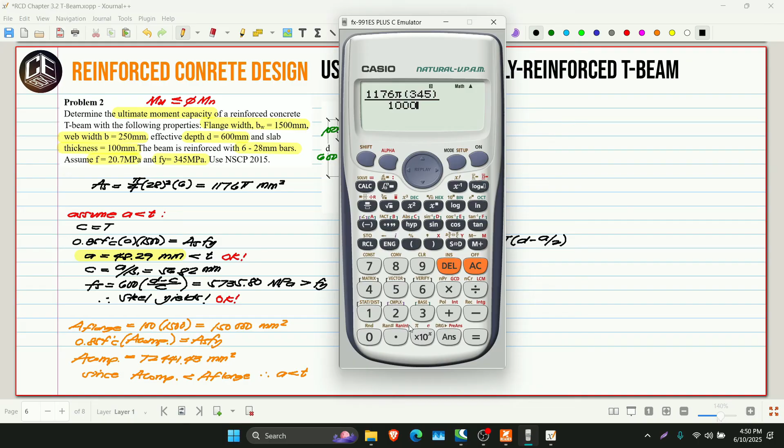So, ano nga ba yung ating C? Na equivalent rin sa ating T. AS Fy na lang, no? So, 1176π multiplied by Fy, 345. Then, divide natin ng 1,000 para maging kilonewton. So, 1274.61 kilonewton. So, masolve natin ngayon yung ating Mn. Multiplied by d, 600 minus a, 48.29 divided by 2. Then, divide natin ng 1,000 para maging kilonewton meter. So, 733.99 kilonewton meter.

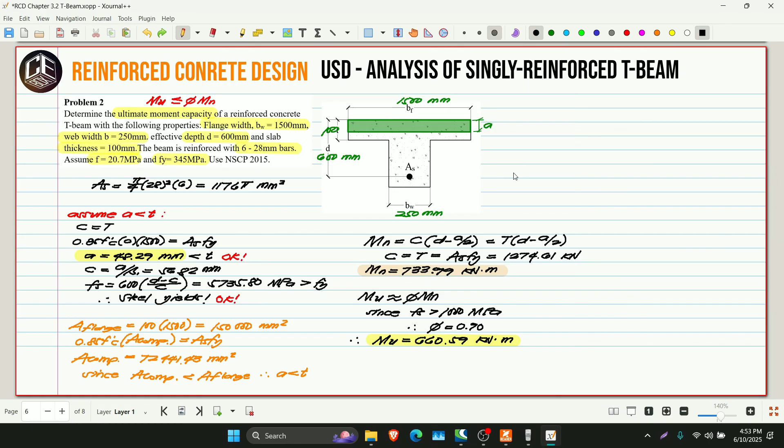So, this is our problem number 2 for USD analysis of singly reinforced T-beam. So, that's our example problem.